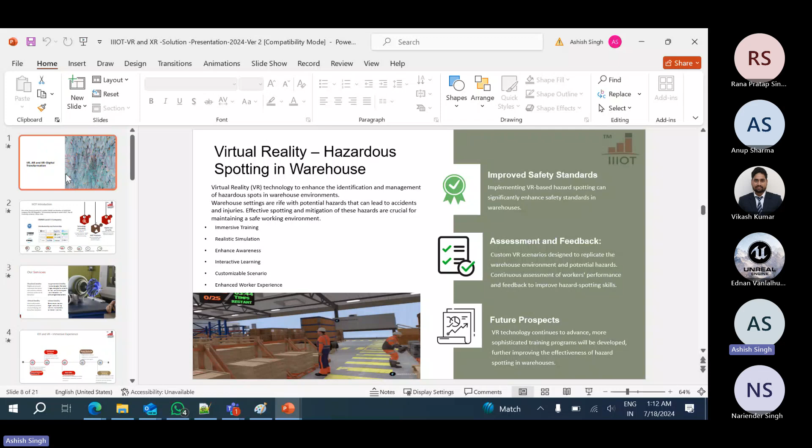I'm going to share my screen first and go over the webinar. So the webinar is about VR, AR, and XR digital transformation. This is one of the most exciting fields of this time - virtual reality, augmented reality, and digital transformation.

First, we're going to talk a little bit about who we are, what we do, and what this webinar is about. We are a triple IoT company, focusing mostly on the asset heavy industry or the manufacturing industry and supply chain. We are one of the CMMI level 3 companies, ISO certified, and one of the best places to work in India.

We not only deal with AR VR products, but we also have triple IoT products that we are pioneers of. This is one of the use cases of VR in the industry, especially in the asset heavy industry or manufacturing industry, where some of the working conditions are very difficult to navigate or difficult to reach.

So you need a lot of training, or you need a kind of pre-hand refresher for your employees. That's where we are going to showcase how we use VR.

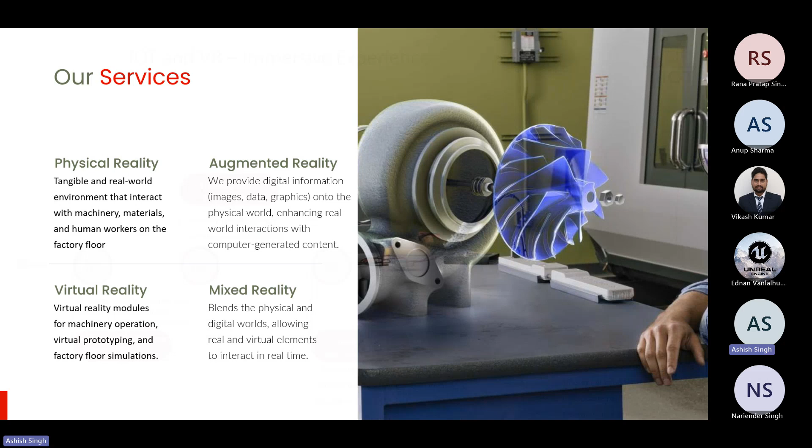Next is mixed reality, where we try to blend both virtual and augmented realities. And physical reality, we all understand - it's whatever we touch and whatever we see, what we live in. Now, another thing about how IoT and VR give, or what are the use cases they give.

So we kind of use it for enhancing the immersive experience, and we use it for training and simulation.

And if you've also heard about smart cities, where VR - and more than VR, I would say AR - would be a good candidate, where now all these maps, like Google Maps or any custom maps, have direction sensing, or direction augmenting realities, that becomes part of smart cities.

And then there's remote monitoring and maintenance. That's where VR finds a good use case.

Other uses could be getting real-time data for environmental monitoring, and then using VR to showcase how it could look like. If it's torrential rain, how would the rain look like? If it's a tsunami, how would it look like? There are numerous use cases.

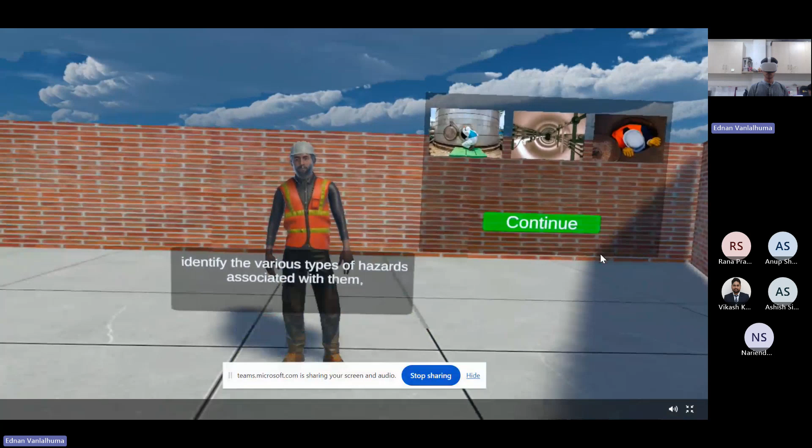So as you can see, Ednan is showing, exploring, and understanding it on the fly, the concept of confined spaces, identifying the various types of hazards associated with them, and learning how to effectively prevent these hazards.

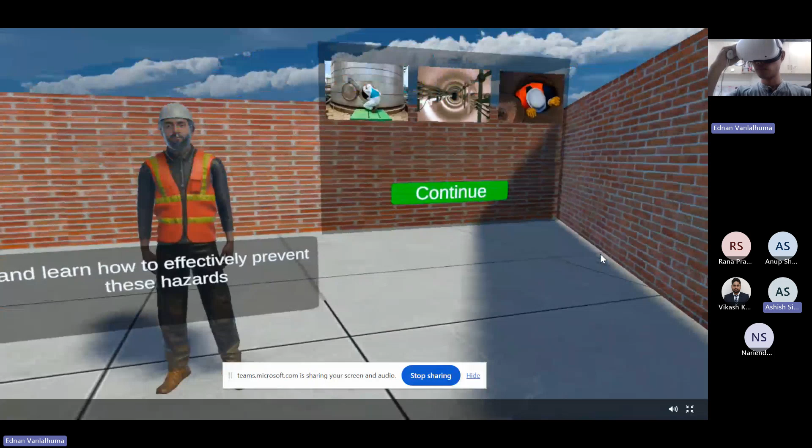Shall I continue, sir? Yes. So the first step, what we are seeing right here, is that he first clicks to go inside the room, and there he's trying to show you a person who can be your guide, and this person is now talking about how to effectively prevent any hazards.

Yes, Ednan, please go ahead. So as you can see, he is interactively hitting the continue button, and we'll go to the next screen.

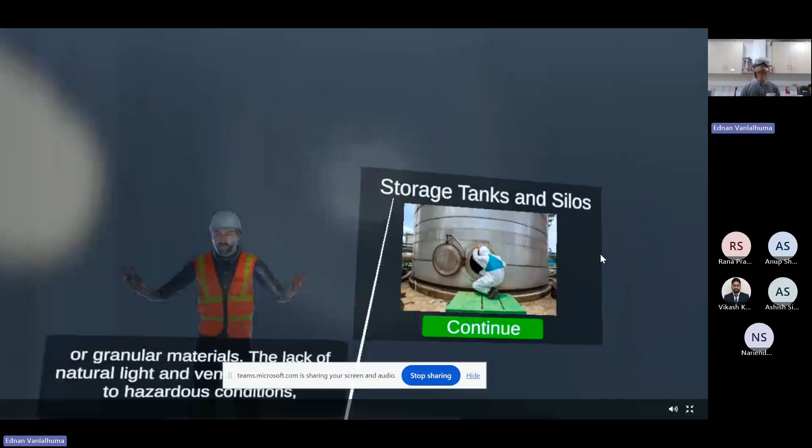Storage tanks and silos. These are typically dark, enclosed areas used for storing liquids, gases, or granular materials. The lack of natural light and ventilation can lead to hazardous conditions, such as oxygen deficiency or the presence of toxic gases.

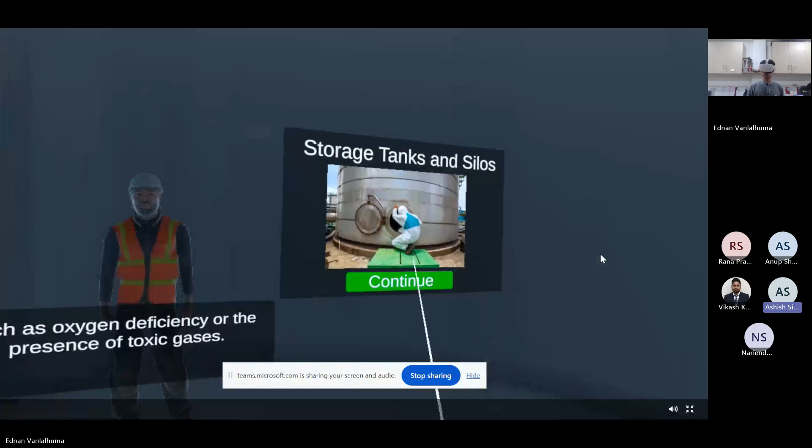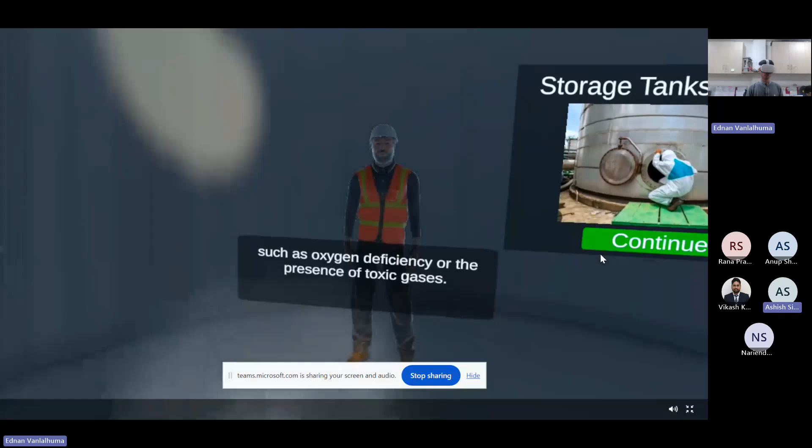Perfect. So as we just heard, this is like training your employee about storage tanks and silos. So as you can see, when a person is shown how it would look, how the silo or storage tank would appear, he has a good idea of what to expect when he's actually doing the work assigned to him.

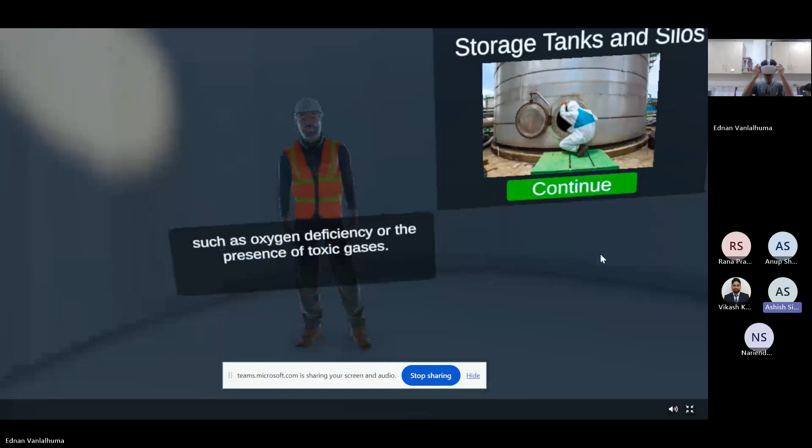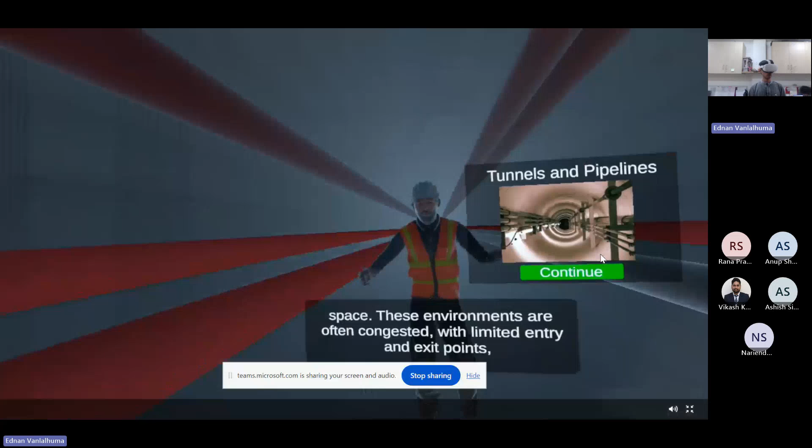Yeah, anything, let's continue. Tunnels and pipelines. Working inside tunnels or pipelines is a common example of a confined space. These environments are often congested, with limited entry and exit points, and can pose serious risks such as poor ventilation, the potential for gas leaks, and restricted movement.

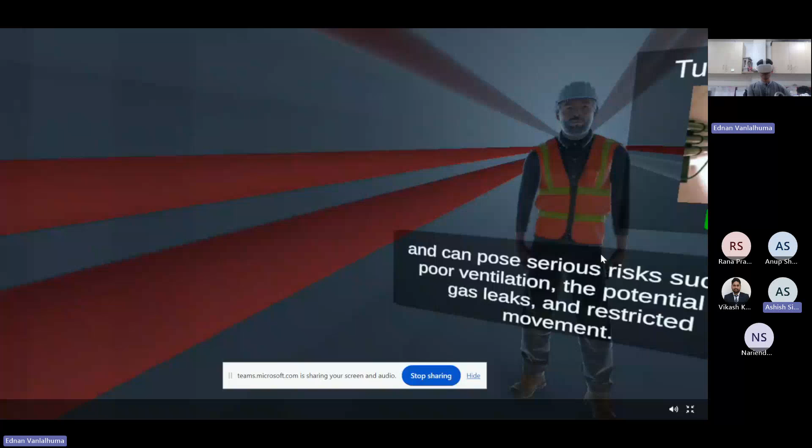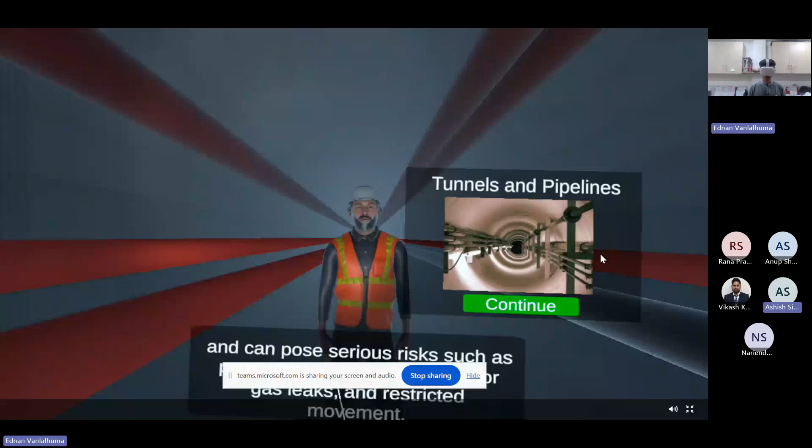And another perfect example, as this demo shows, especially in the oil and gas industries, or if you are cleaning or doing any maintenance of underground sewage, or any other maintenance activity where there's space confinement, this very nicely portrays what to expect, and the user could already be prepared for what comes next.

Yeah, anything, we can move ahead. Underground utility vaults. Utility vaults are enclosed areas used to house electrical, telecommunications, or other types of infrastructure. These spaces can be hazardous due to the presence of live electrical equipment, limited airflow, and the potential for flooding.

Yeah, again, as I was mentioning, having learned about confined spaces, we will now focus on enhancing the safety of our work environment. We will conduct training sessions in confined spaces to address and mitigate potential hazards effectively.

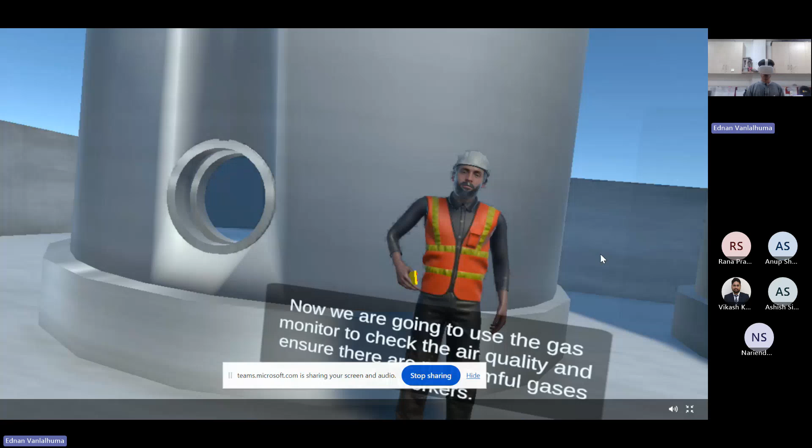So now we have come out of the confined spaces. Now we do hazard training. Now we are going to use the gas monitor to check the air quality and ensure there are no harmful gases for worker safety.

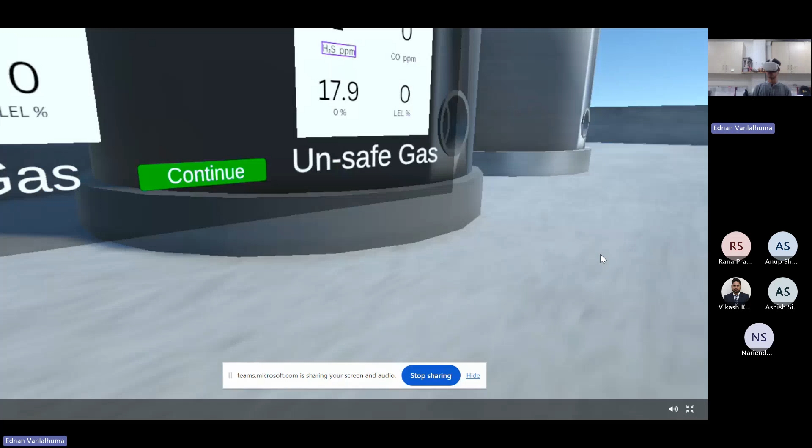You will see concentrations displayed simultaneously. Hydrogen sulfide (H2S) and carbon monoxide are measured in parts per million (ppm). Oxygen is measured in percent by volume. Combustible gases and vapors are measured in percentage of lower explosive limit, represented as %LEL. LEL represents the presence of combustible gases. In a fresh air environment, you will see your oxygen reading at 20.9% and the rest at 0.

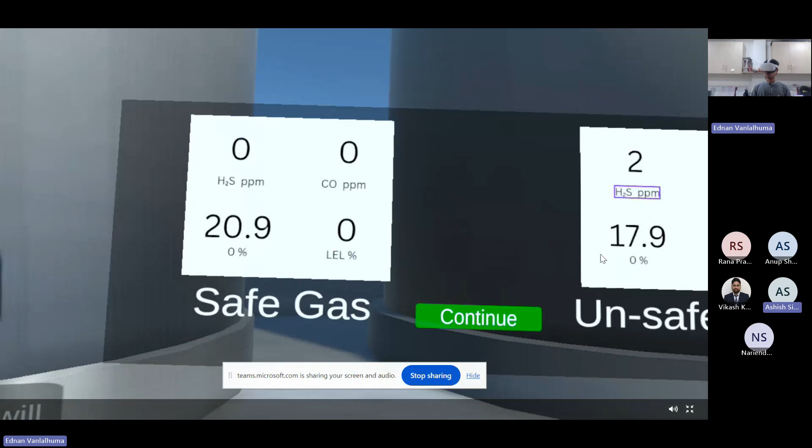Now, take your gas monitor and check all the tanks to determine if they are safe or harmful. That was a great, Ednan.

Can we just have a quick stop there? So that was one of the use cases of how to use any instrument, especially for manufacturing, the measuring of gas quality that you mentioned. So you can see the training is not only limited to hazard, but it also shows how to read the meter reading, and thus gives the trainee a good comprehension of what to expect next.

Yes, Ednan. Yeah, we can go ahead. Thank you. The tank is safe for work.

Great, great. Yeah, that is how a worker would go and check if it is good to work, or if anything else.

The tank is unsafe, combustible gas detected.

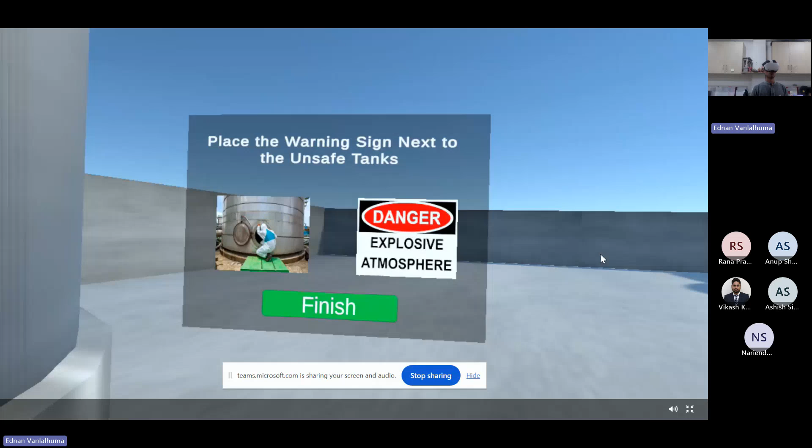Place the warning sign next to the unsafe tanks.

Correct. And Ednan, let's just pause here for a bit. So as you saw, one tank was good with the air quality. The other two were not as good as expected. So what he showed is what should be the next step, the next preventive step.

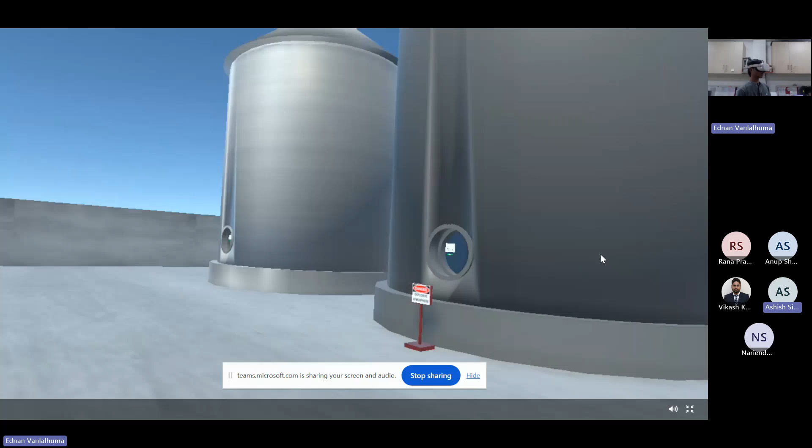So you use the danger sign and keep it at the place so someone else could know that it's a danger. Thank you for joining us today to learn and understand confined space training by IIoTalytics. Feel free to check out more of our training videos. Thank you.

Thanks, Ednan. That was a good demo. I'm gonna share the screen and go back to my presentation. That is for confined space, sir. Perfect, perfect.

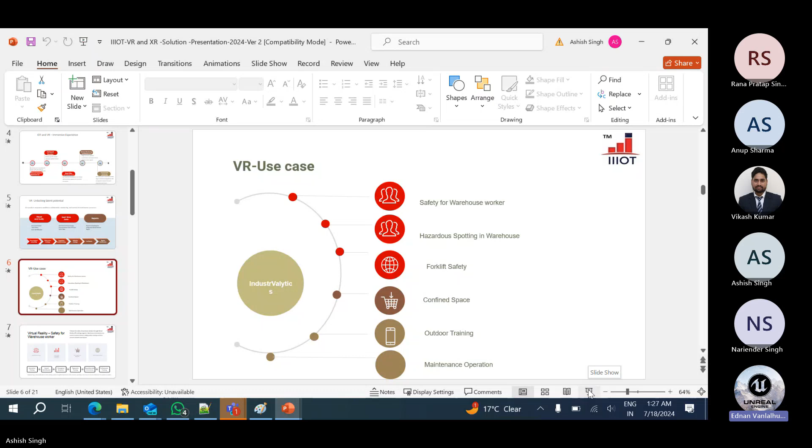And the next is for which one, Ednan? Yes, sir, the next demo is for the forklift, the forklift safety, or any other that you want to showcase. Should I continue with forklift safety? Yes, yes, perfect, we'll jump on to the next, the forklift safety.

I'm gonna just talk a little bit about this. So in the previous demo, you saw the hazard spotting in the warehouse. You saw the safety for the warehouse worker. You saw how the worker can be trained that when they see anything hazardous, they have to label it so that anyone else who comes later knows that a danger is present.

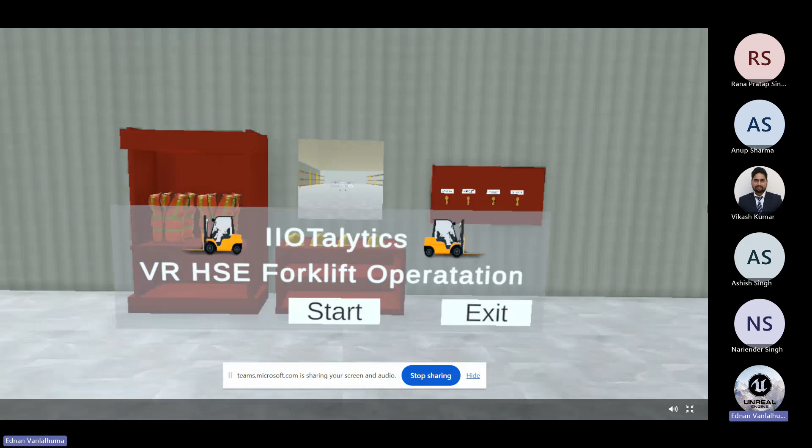Welcome to this IIoTalytics VR forklift operation training. Today, we will learn about the important aspects and precautions necessary for operating a forklift to ensure a safer working environment.

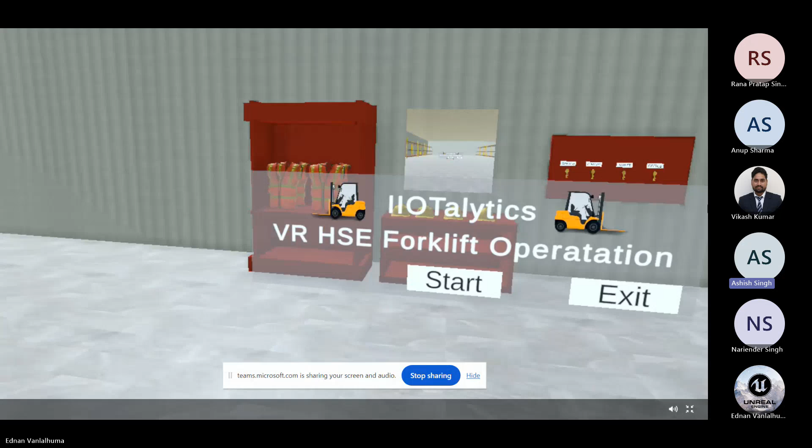All right, so this is what we are talking about, training the existing employees or giving a refresher course to an already employed worker. Yeah, that's a good start.

Please proceed to the equipment closet and put on the safety helmet and reflective vest. Well done.

Now proceed to the forklift and examine the wheel pressure, battery, rear and side mirrors, and the horn. 90 psi, this is appropriate for optimal operation. 85 psi, this is appropriate for optimal operation. The battery is in good condition. 87 psi, this is appropriate for optimal operation. 92 psi, this is appropriate for optimal operation.

Well done. Now proceed to the forklift and examine.

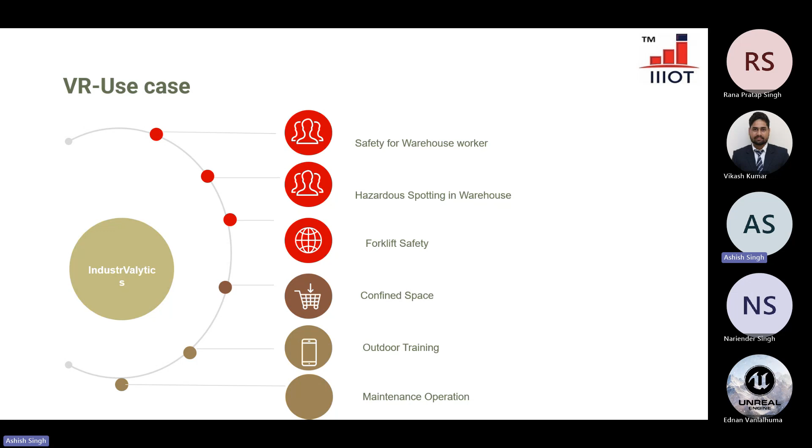One of the other very common use cases is maintenance operations, where we want to show what maintenance activities we need to perform. That could be electrical maintenance, mechanical maintenance, or new construction. So the options are unlimited, and the sky's the limit for what can be made AR or completely VR video.

Now I'll just go over some of the slides for the sake of completeness. We saw how we used it for interactive training. We did hazard identification, and the do's and don'ts of forklift training.

And what would this give to us? As a company, this helps the company remain safety compliant, helps them be more responsive, and helps them maintain the safety standard. And all this AR VR can be attached for other alerts and notifications, and can be part of your real-time monitoring as well.

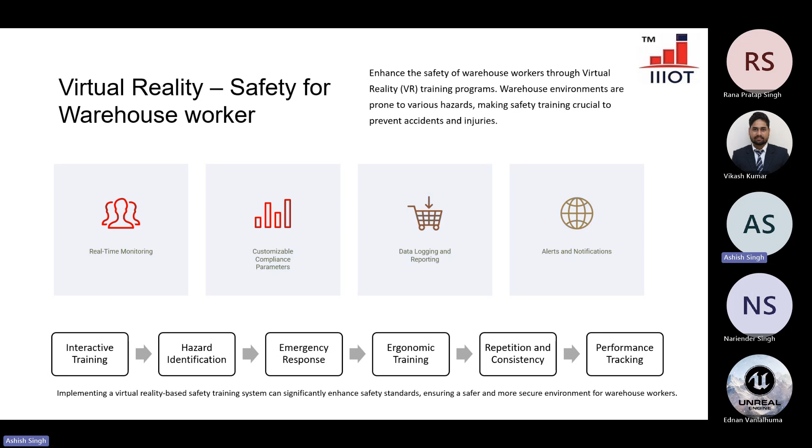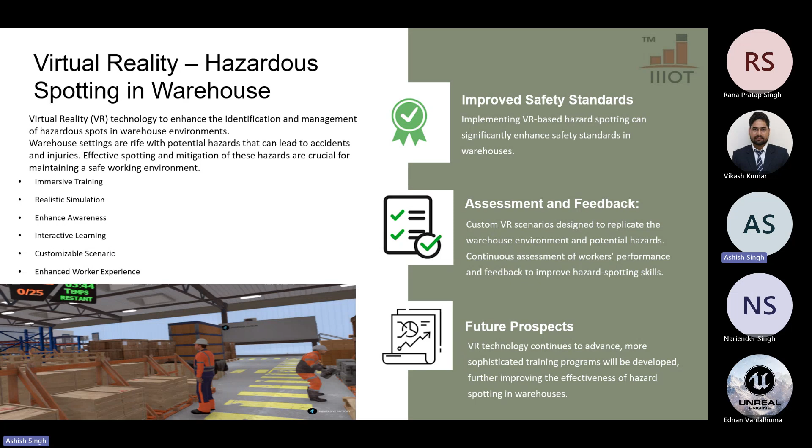This is again a slide of what we did for our warehouse safety, reiterating the points: improved safety standards, assessment and feedback, and of course they can be customized to be more advanced and sophisticated trainings. And I guess forklift safety training, same use case.

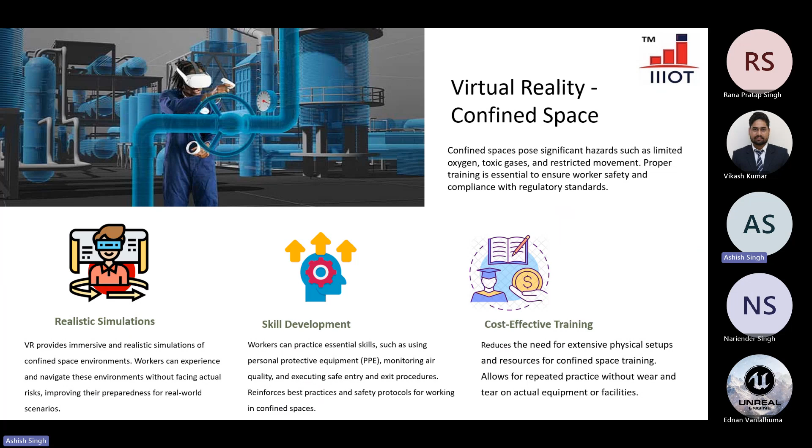Confined space, we saw it as one of the best use cases for VR, because one thing to keep in mind is that you are not risking the life of any worker. He would already be trained to expect what can come next to him, so he's more well prepared, better skilled, and has a realistic simulation of the environment. And overall, it just improves the cost effectiveness of the training as well.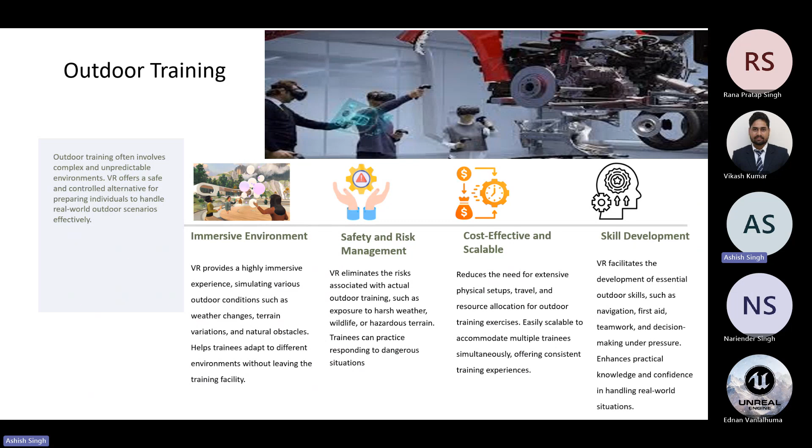And as we were saying, this is not just limited to indoor training; it could be outdoor training as well. It gives you a quite immersive environment, it's cost effective and scalable, and the best part is, if some machines are really costly and you still want to do training on that, you can just make a prototype of the machine and let your users come have a look at it and play with the VR of it.

If you want an interactive training session that's scalable and helps the user do it on their own time, that's where these VR-related custom trainings can be helpful. They keep and maintain safety of the employees, and don't restrict them, by giving them a safe environment to experience what would be coming next to them.